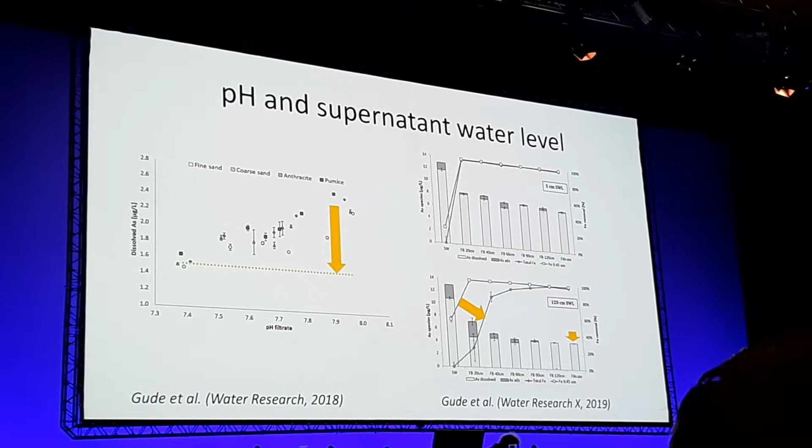What I find particularly interesting is we also tested the supernatant water level, that's on the right. On top we had a really low supernatant water level, that's the water on top of your filter if you have a saturated filter. On the bottom we increased the supernatant water level to 1 meter 20. What you do then is stimulate homogeneous iron oxidation over heterogeneous iron oxidation, meaning you form flocs that are more mobile in your filter bed, which you can see on the right where the iron is plotted, ending with a lower arsenic concentration in the end.

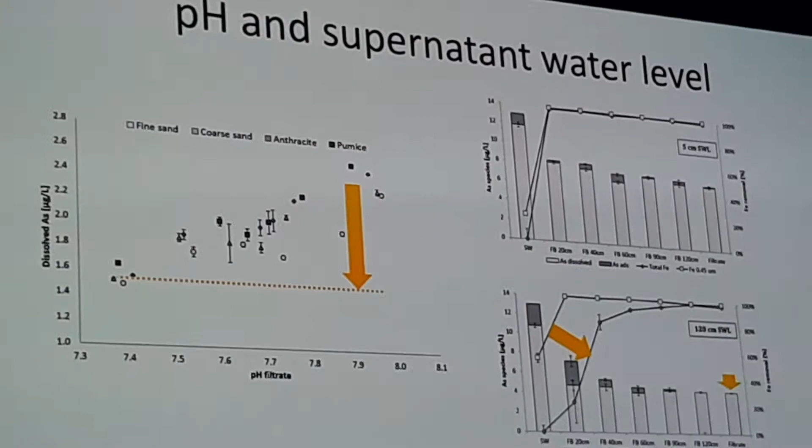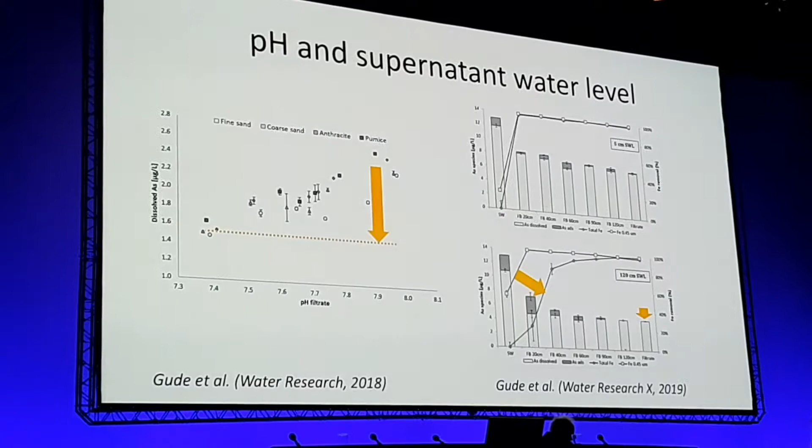But we also go to Bangladesh. This is Kajul, a PhD student, and the research we're doing in Bangladesh is in the region where he's originally from. He's investigating how to use these insights for a system in Bangladesh.

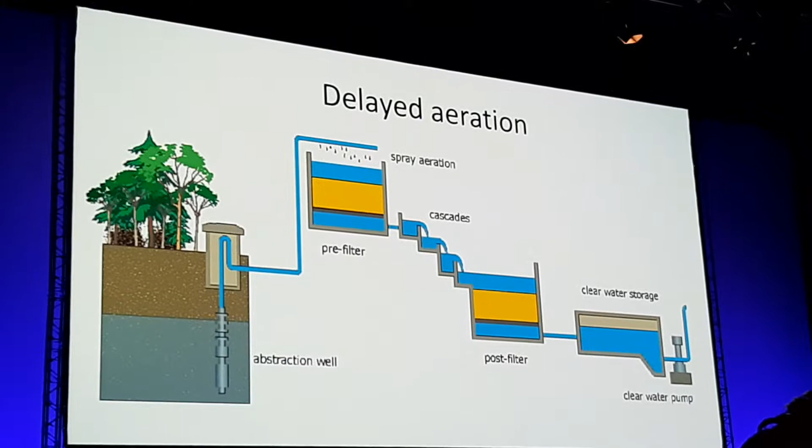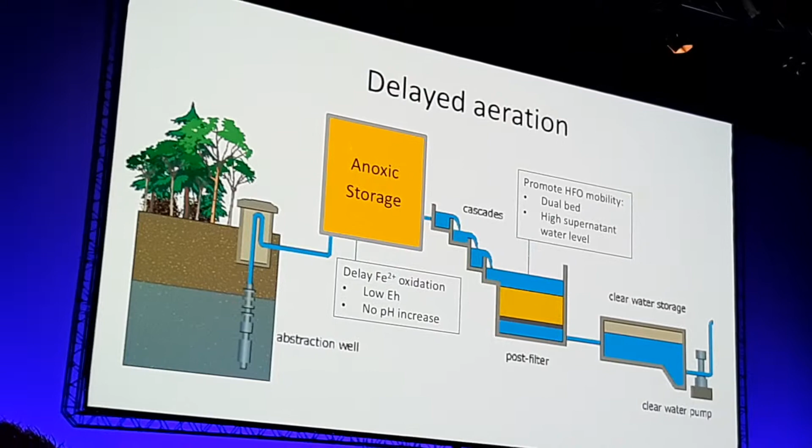What we did is we wanted to delay this iron oxidation, and we decided to do it with anoxic storage prior to aeration filtration, because at low EH and without aeration you would not have a pH increase. This would reduce the iron oxidation, together with the promotion of HFO mobility in a dual bed and a higher supernatant water level.

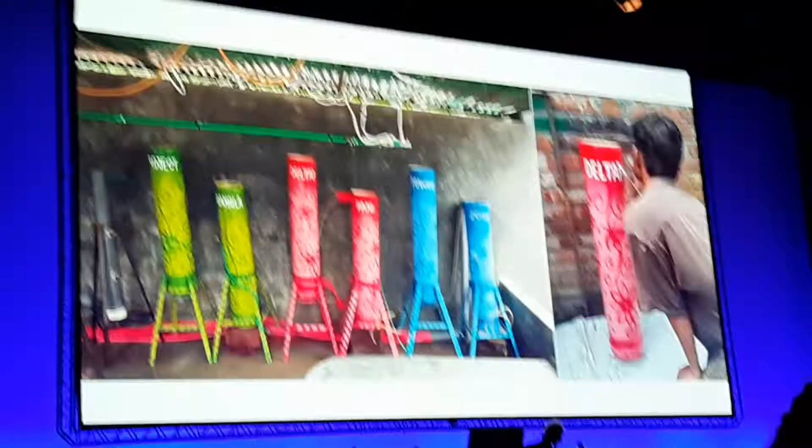Well, the setup in Bangladesh looks really nice. Yeah, normally you have these dusty PVC columns, but we collaborate with industrial design engineers, and they found a rickshaw artist available to make this for all of our filters. Really nice, the color makes it.

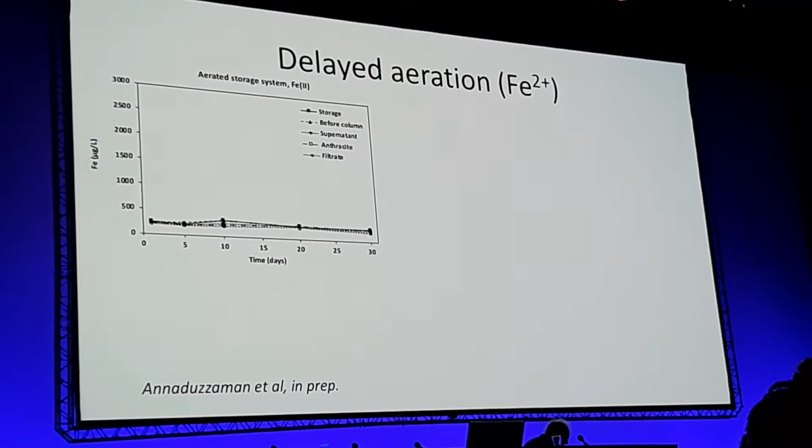The PhD candidate is still digesting the results, but I thought I would share them with you anyway, because I think they're spectacular. So if you have an aerated system, just plain aeration filtration, you remove your iron rapidly during oxidation, as I said before.

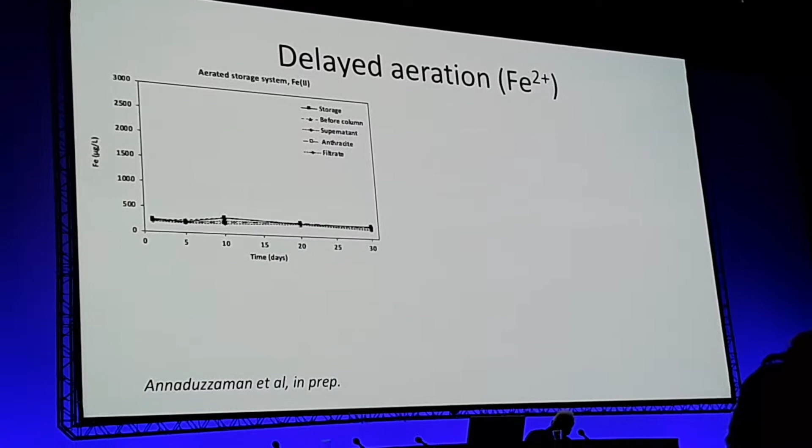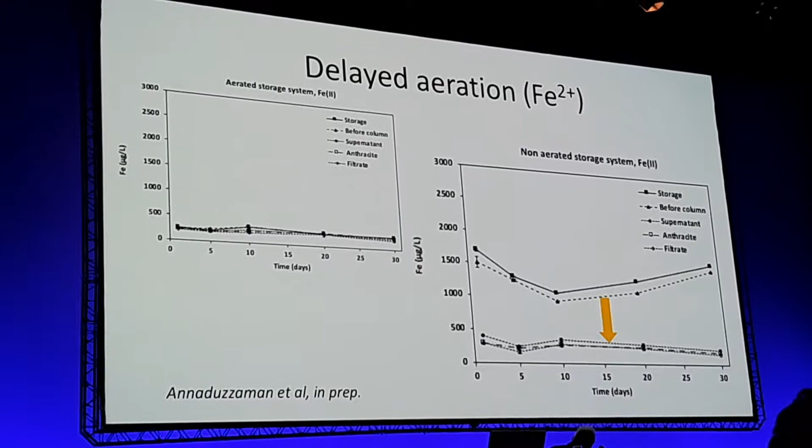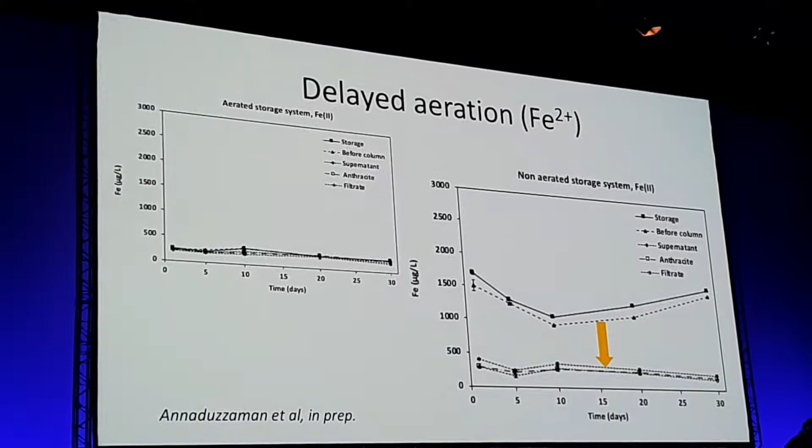So all the iron plots overlap for either sampling in the storage container or before and after the filter. However, if we have no aeration, we call it anoxic storage, but I suspect there's some oxygen contamination in our system, because we do get iron oxidation already on day one, but only partially, which is really nice, what we wanted. The iron is not removed in the storage container, but is removed after aeration.

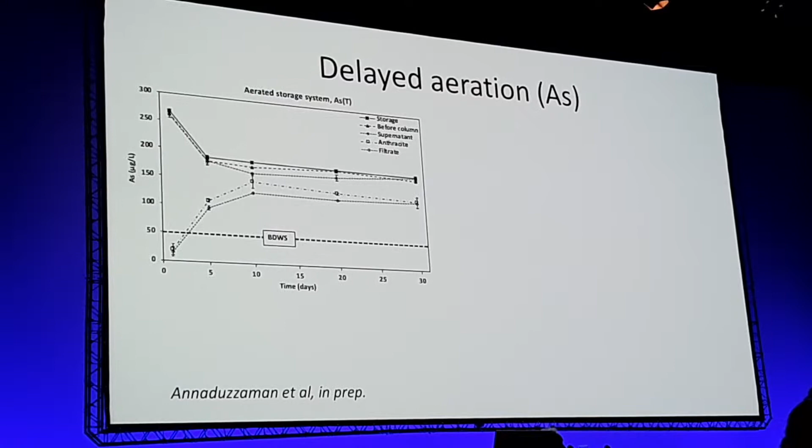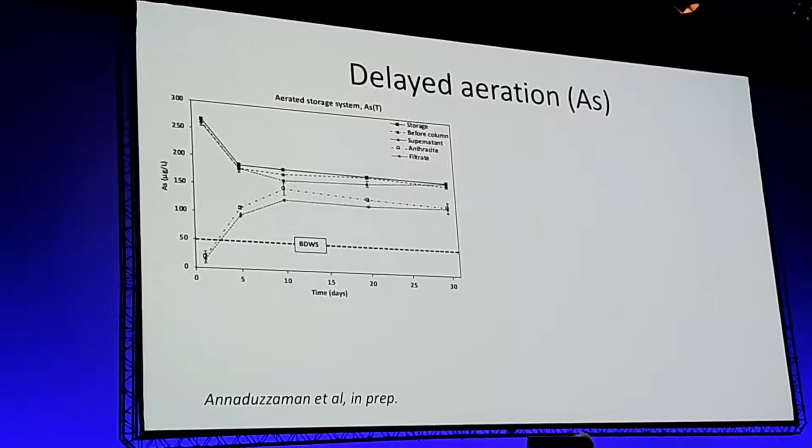As a consequence, in an aeration filtration system, we go from about 300 micrograms per liter to 140 micrograms per liter. So initially there seems to be better removal, but I suspect adsorption on the sand we were using, which is just natural sand from there. So the removal is just over half of the arsenic.

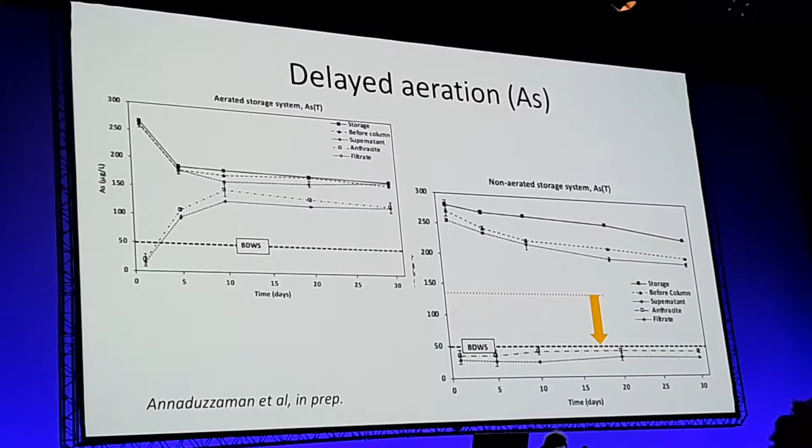Whereas if we have a system where no aeration has occurred, we reach 40 micrograms per liter, which is a huge improvement. And I think we can even do better, but this is a really nice start.

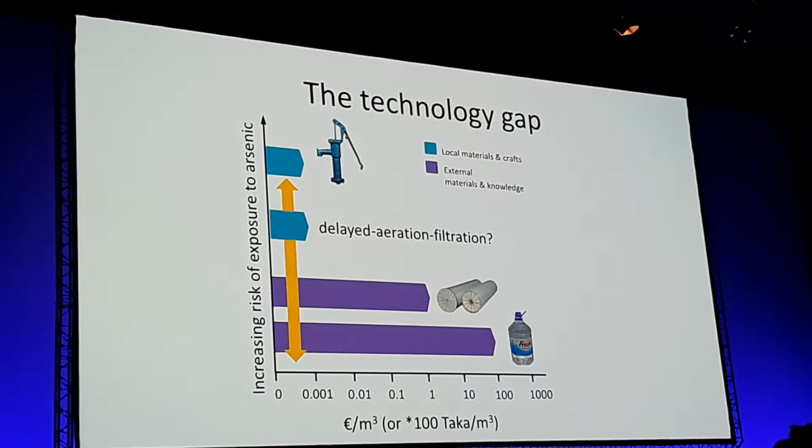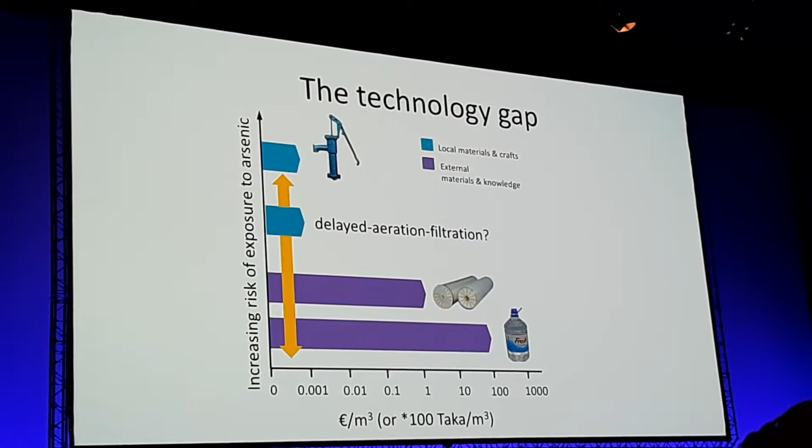Yeah, but does this fill the technology gap, eh? So I think every story needs to have a head and a tail. I don't know, I think this is a big jump still ahead. But what I do like is to experiment and see what we can do with these process-related insights towards design of a system that could be applied.

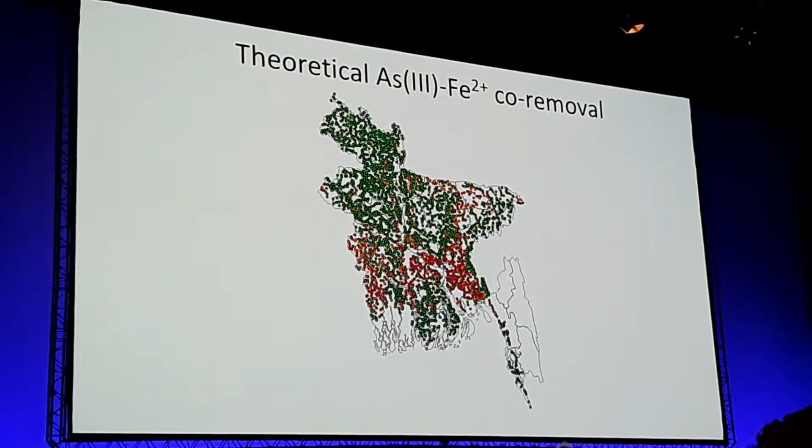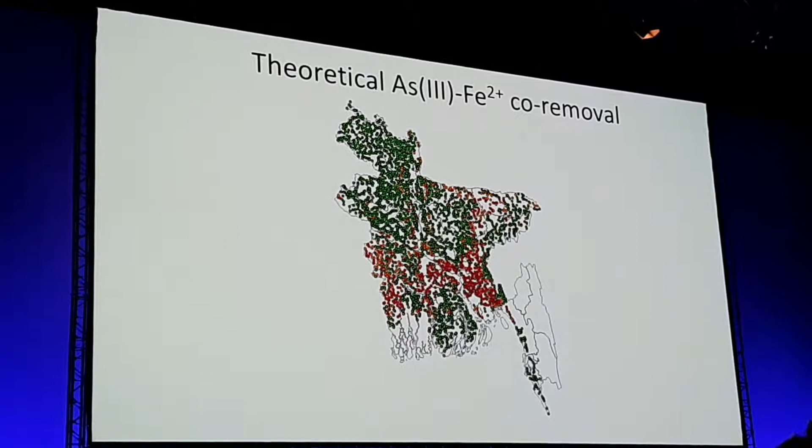And if we may dream, the theoretical removal of arsenic-3 with iron, if you look at the arsenic-iron concentrations that have been measured in the BGS study, the map would look like this. Slightly different than the earlier map, but it's difficult to find the differences. And if we would work with a system where we optimize iron removal, co-removal with arsenic, it looks like this, meaning that instead of 65, 95% of the wells in Bangladesh can remove arsenic just by relying on the iron in the water. So there's the dream.

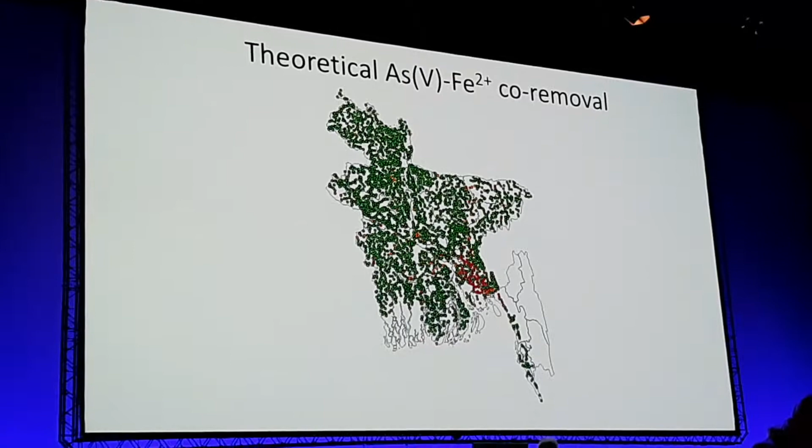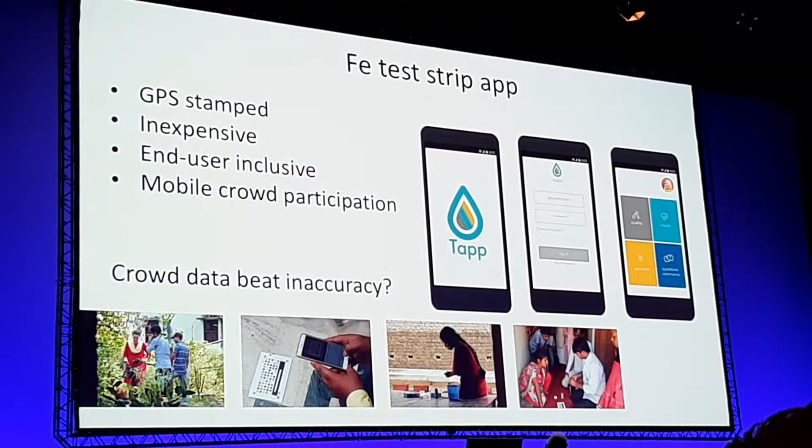What's next? Well, what's important is to know, of course, where's the arsenic, but also where's the iron in the system, in order to start constructing filters, whether it's central or decentral, it doesn't matter.

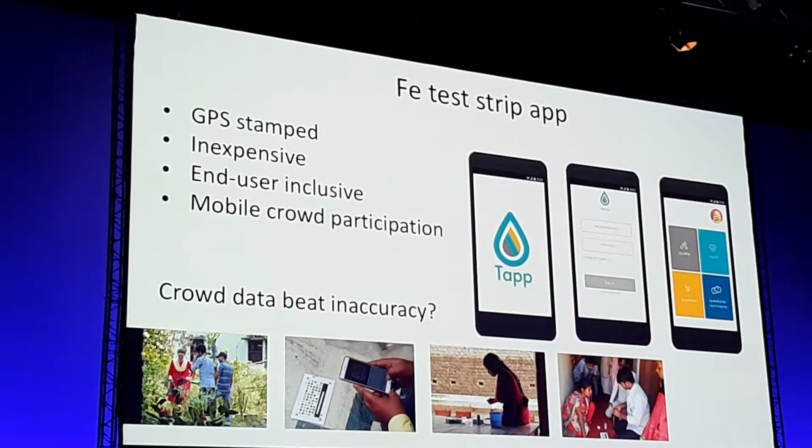So what we tested was an iron test strip app. It's an existing app where an iron test strip is combined with the app. Maybe some of you have used it. It's inexpensive, easy to use, so we had it used by end users themselves, and we wanted to generate crowd data with that. But does this crowd data beat the inaccuracy of a test kit like this used by untrained people?

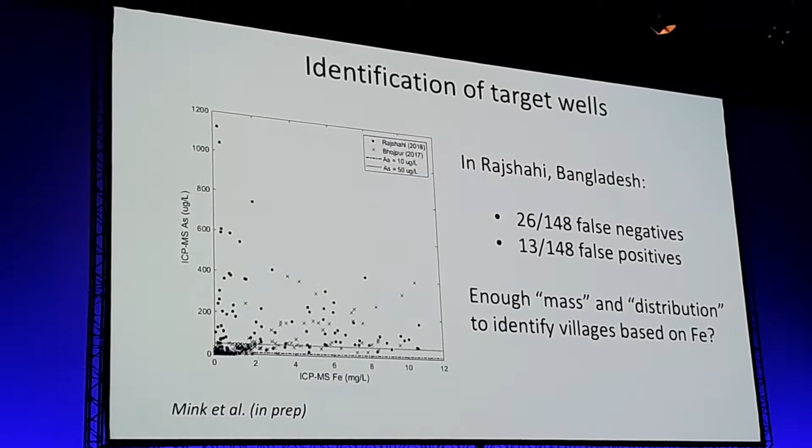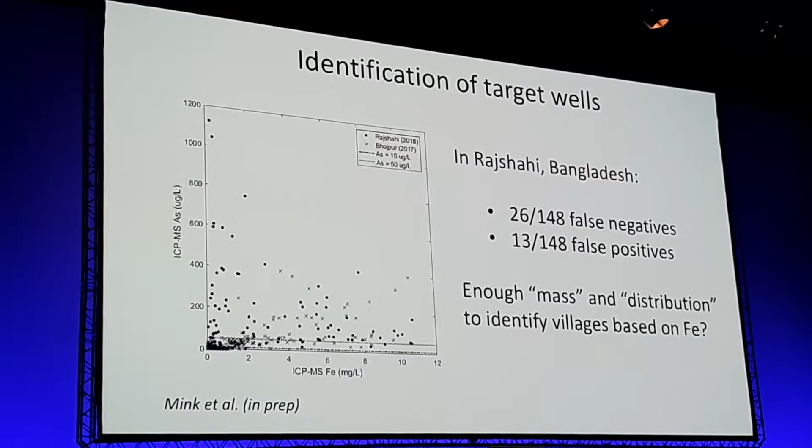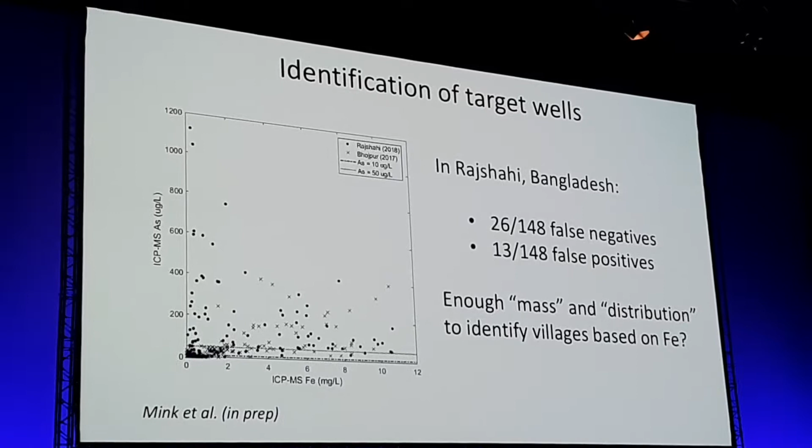We did this study in India and Bangladesh. I'll focus on the Bangladesh data here. In this map, it's just the ICP-MS data for arsenic and iron. If you take a glance, you see there's not a really strong relationship between the two. You can also see in the false negatives that there are 26 out of 148 in our study area in Bangladesh.

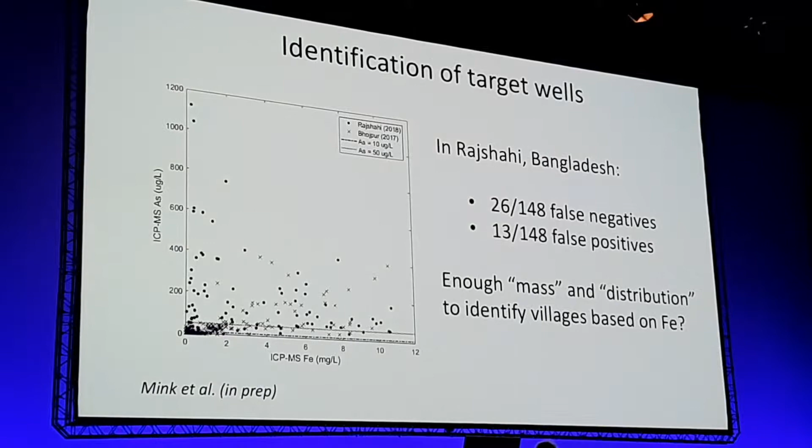So at first glance, maybe this doesn't work. However, if you generate enough mass and the distribution of your false negatives is evenly spread through an area, through the villages geographically, for a screening tool it doesn't matter so much.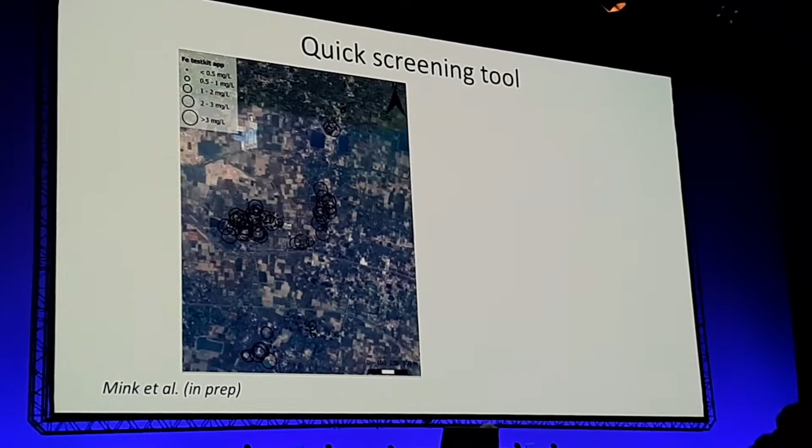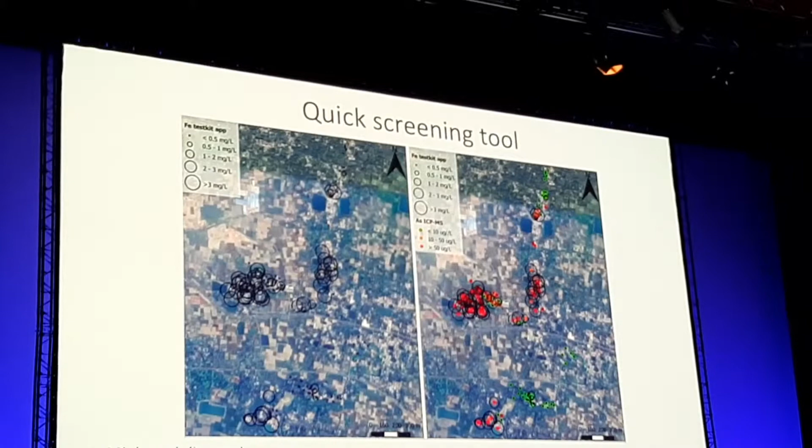And indeed, if we plot our arsenic data on top of these test kit data, you get a really nice map. So I would say, even though this relationship between the two is not perfect, as a screening tool for local governments it can work really well, as well as for empowerment of people, so they can test their own well, showing to the government that we have an issue potentially in our village.

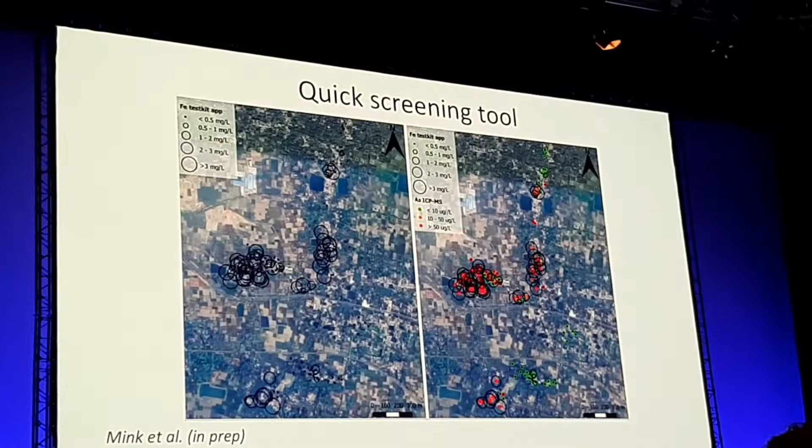So, conclusions for practice. Yes, it is possible to enhance the removal of arsenic with naturally co-occurring iron, using simple engineering tools: applying a coarser filter media, operating a higher supernatant water level, maintaining a lower pH, and using anoxic storage prior to aeration.

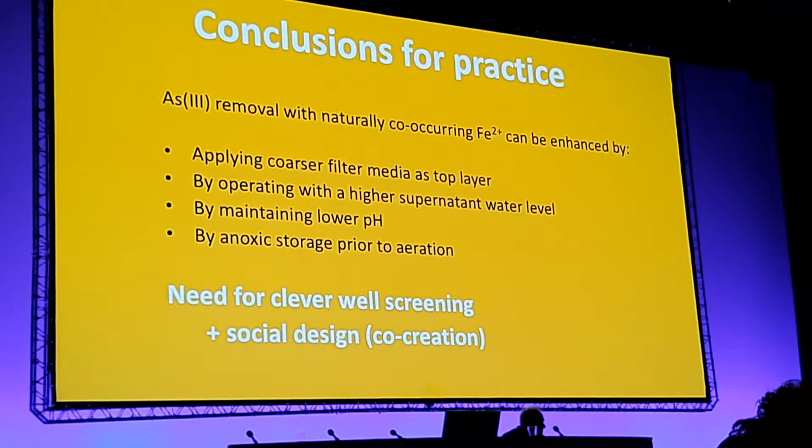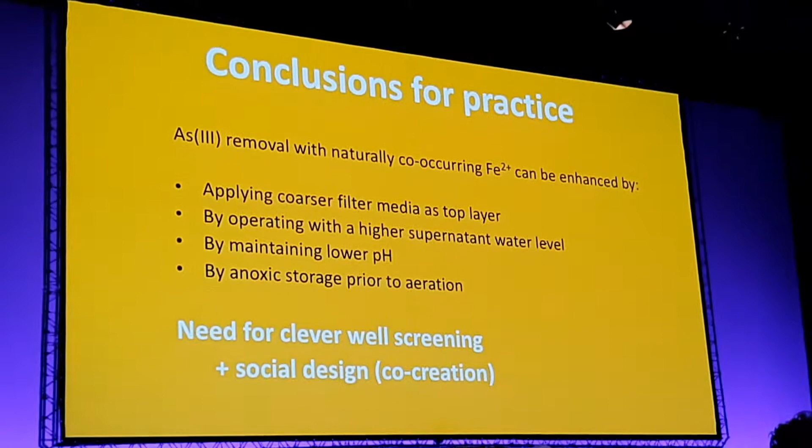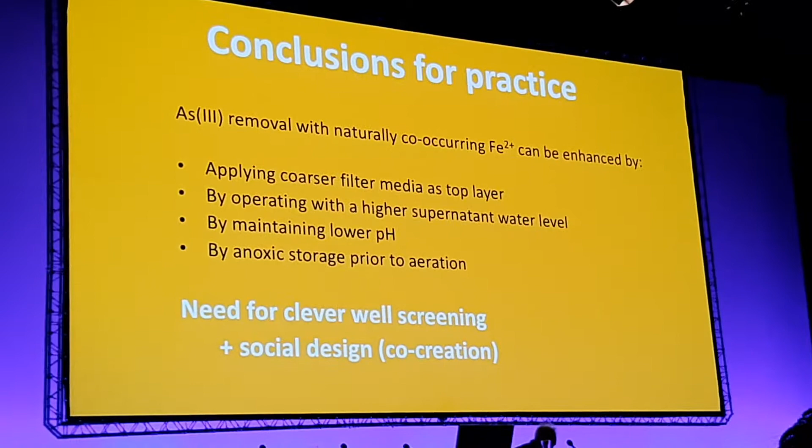But in Bangladesh, there's a need for clever well screening, as well as social design. Maybe co-creation, you've heard of it, it's key to working in villages like this in the international context. But it's also difficult, because among engineers it's logical you co-create, but if we talk about end users in a village, how do you co-create with them? They are your customers in a sense, or the customers of your local partners at least.

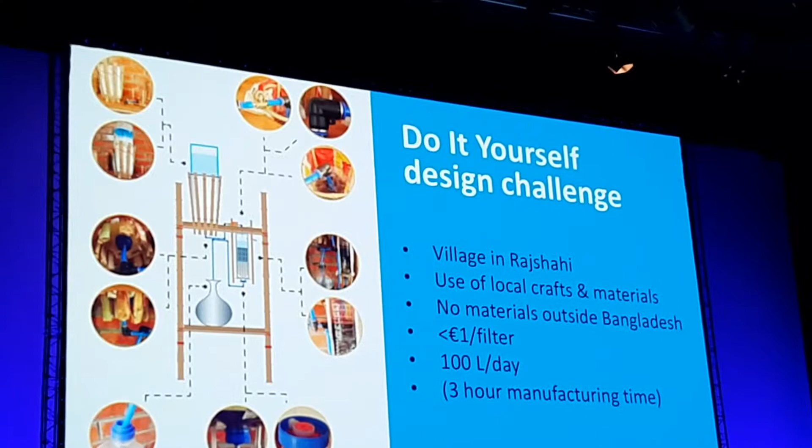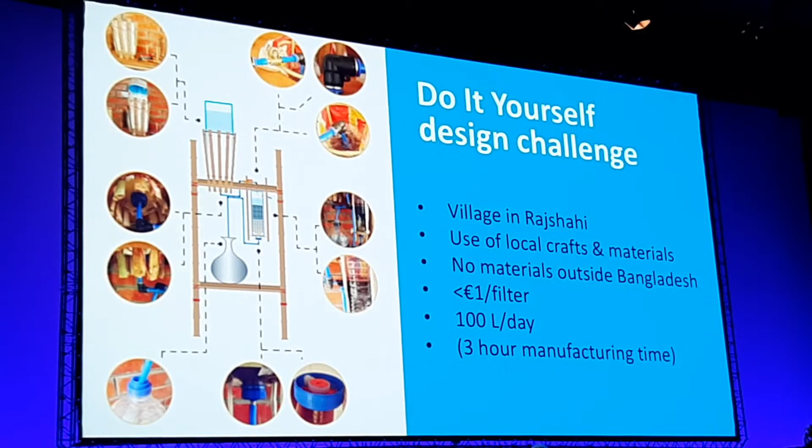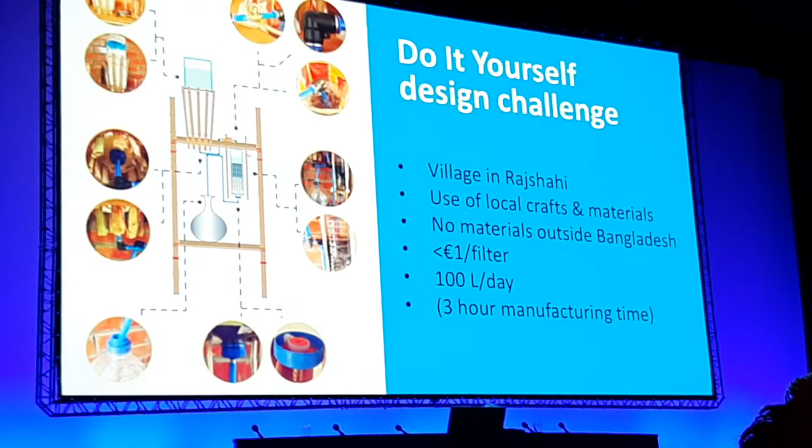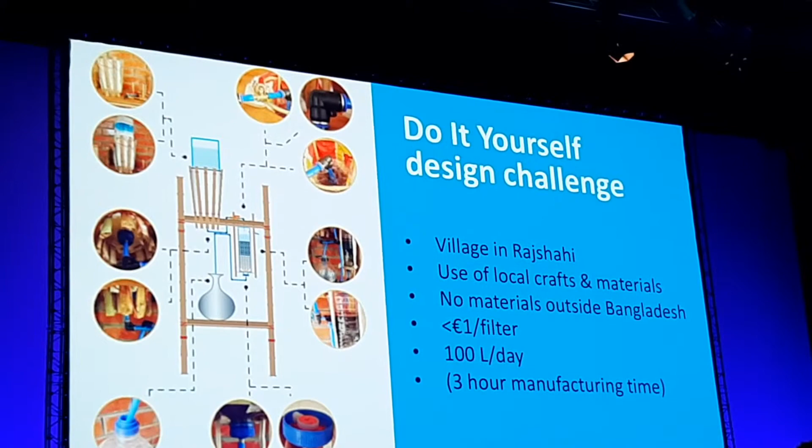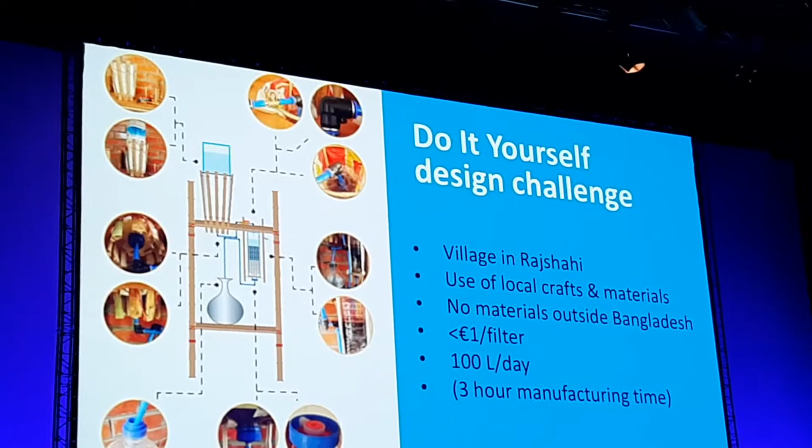I want to get rid of those in future designs. The filter should be really cheap, produce enough for a family or more. And they added their own criterion, that they should be able to construct it in 3 hours.

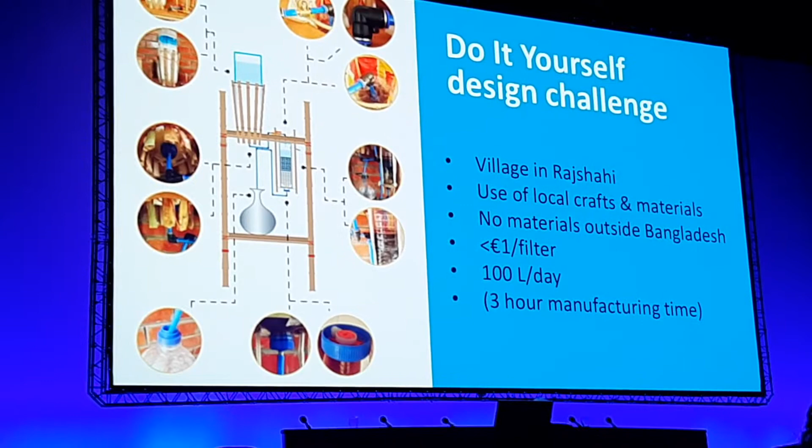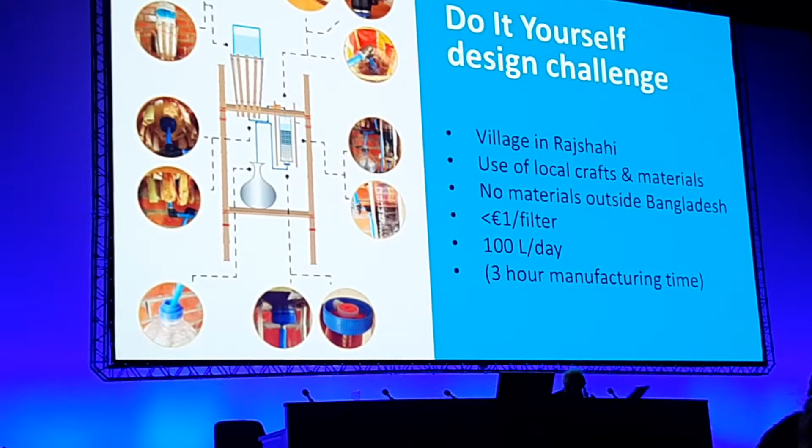So my own civil engineering students always just spit out data, the slides I just showed you. But these industrial design engineers, they keep a blog. I want to show you a short fragment of this blog. I think it shows what kind of environment we work in. It's a loud environment. But also, to me, it gives this grassroots feeling that I know this solution might not be the solution, but it's something that activates people, which I think is valuable.